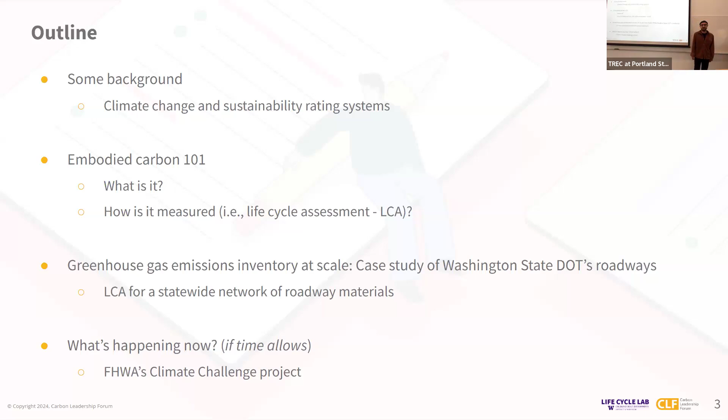or other environmental impacts. And then I'm gonna shift to the project that I was advertised to talk about today, which was the inventorying of greenhouse gas emissions from roadway construction for WSDOT. And then if we have time, I really didn't practice the timing today, but if we have time, I'm going to talk about what's happening now in the world of embodied carbon and life cycle assessment. So we'll see how much I can get. All right.

Do I really need this slide? I don't know. Maybe not important.

Climate change is real. It's happening. We have a ton of evidence. I'm not going to spend like 2 hours proving that it's happening. But what is probably interesting here is, as you may know, global temperature has a very high correlation with the amount of greenhouse gas emissions, in particular carbon dioxide, that we put out in the atmosphere. So it's evidently not the sole cause of rising temperature and climate change, but it is one of the most important. And also, buildings and transportation infrastructure materials matter.

They dominate the raw material consumption globally and in the US by over, I would say, 80% of total raw materials that we consume. Steel and cement alone are responsible for more or less 15% of global greenhouse gas emissions. Again, global is the key here. It's a little bit less in the US. But again, big deals, steel and cement alone. Cement alone is thought to be about 8% of total global energy consumption and CO2 emissions. So that's a big deal.

And also on the policy side, we see a surge of new policies coming that try to limit the amount of embodied carbon that we put out in the atmosphere. And you probably have heard of Biden's BIL, or bipartisan infrastructure law, that put out a lot of research money to see what we can do to reduce those emissions.

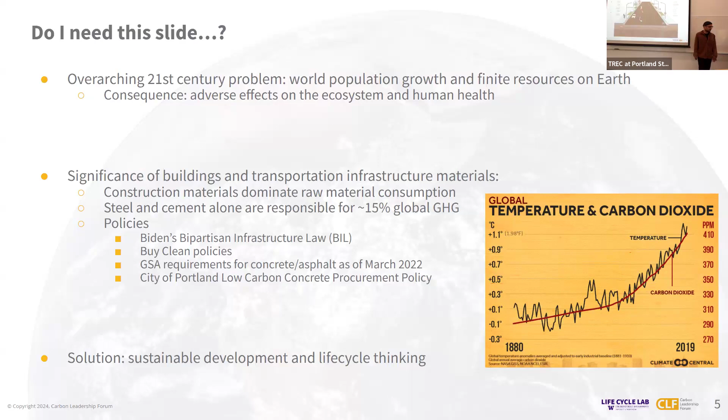So the solution to all of these things, if I want to put it very simply, is just sustainable thinking, life cycle thinking, and sustainable development. But it's a mouthful. There's a lot going on in just this simplest statement. So I try to kind of uncover some parts of it that I spent time on during the past few years.

All right, so I'm going to narrow down the focus a little bit here to roadway infrastructure because when we talk about infrastructure, I mean, buildings make sense. We know what buildings are. But when we talk about infrastructure, that's a very umbrella term for a lot of things. We have transportation infrastructure, water and wastewater infrastructure, electrical infrastructure, airfields, railways, metro. So we have a lot of different types of infrastructure.

But my research really focuses on roadway infrastructure, which is again not just pavements. People in the roadway infrastructure world think of roads as just being pavements, but that's just the surface of it, literally and figuratively. If you want to just talk about pavements, you're just touching the surface of it. There's a lot going on around it, underneath it.

You can see some of the labels here probably. Hopefully we can see them, but you can visually inspect them. We have sidewalks, curbs and gutters. We have a lot of pipes going underneath. We have sublayers. We have a lot of other things going on. So if you want to capture a good picture of what a roadway is, it's not just pavements. So I think that's just the message here.

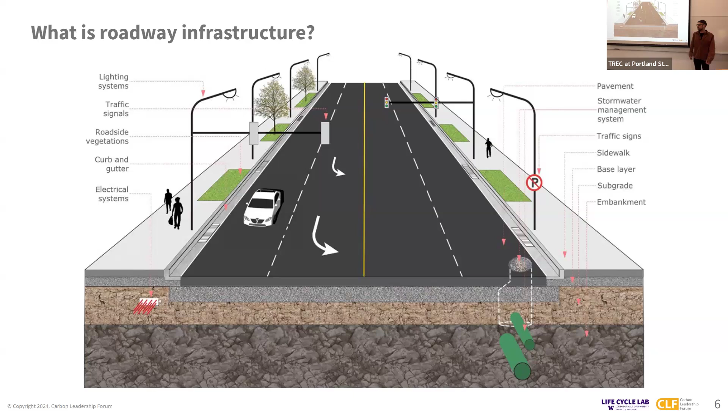So this is sort of where my journey into sustainability, and especially sustainable transportation infrastructure, started. I started with rating systems, and I think it actually started for buildings as well. Building sustainability sort of got more traction when rating systems started working. So how many of you have heard of LEED certification? So almost all of you, right? So it started, I think, early 2000, or late 20th century.

And then a little bit later, I would say a decade later, the transportation or roadway infrastructure industry is lagging behind a little bit from the building side. They're just following mostly how buildings evolve in terms of sustainability. And we at UW developed one of the first rating systems for roadways and transportation infrastructure, called Greenroads, in 2009. And I was lucky enough to join the research team that actually developed this.

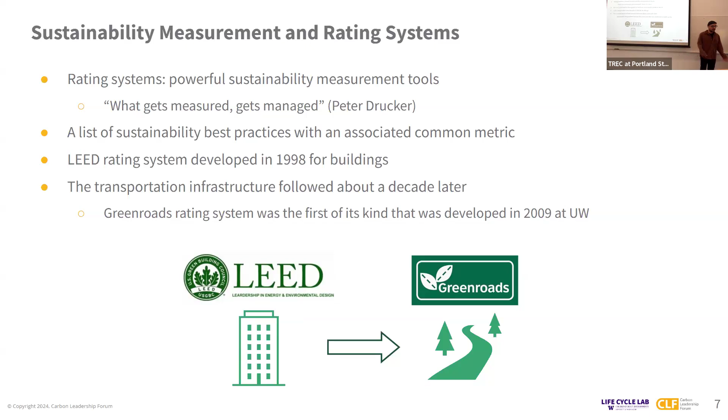So I started collecting a lot of data from them. I started looking at what sustainable roadway infrastructure will look like. And this is just one way of looking at what we're searching for when we talk about sustainable infrastructure or sustainable roadways. So you can see what I call a scorecard. There are some sustainable practices from this rating system in particular, and there are more rating systems now, like INVEST or Envision, that are mostly from the federal government, but we're using this scorecard as a very insightful one.

So a lot of these terms may be repeated in other rating systems, but the goal of this is to put things into numbers so that we can measure things. So this is kind of the main goal of a rating system. Just put some numbers into some things that we cannot really measure with a ruler, so that we have a common metric, so we can add them up, we can compare them.

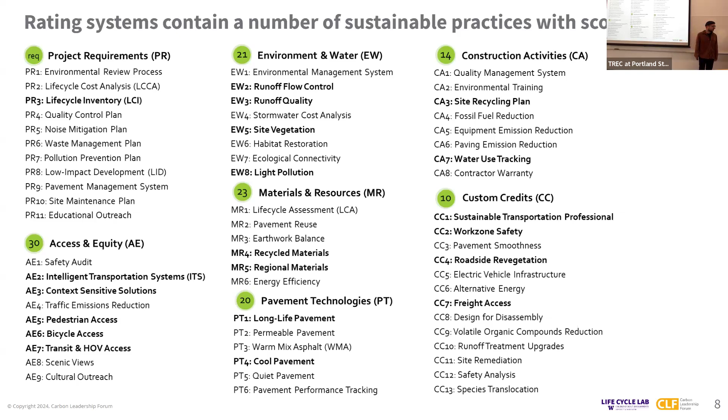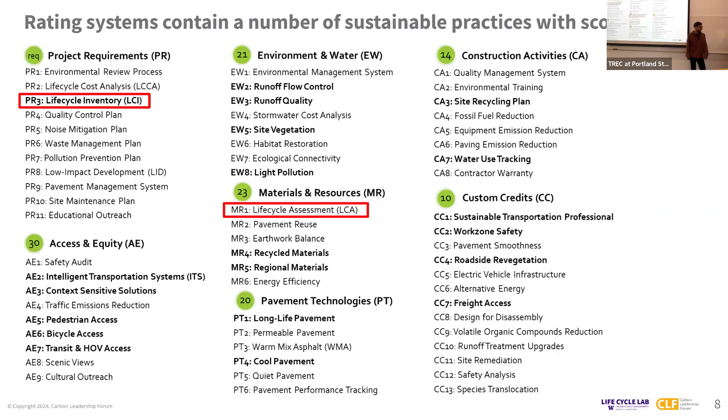And as part of this, you can see, again, this is just an example of an actual old version of Greenroads. But you can see life cycle assessment and life cycle inventory, which are both terms related mostly to embodied carbon, but related to life cycle thinking happening here. And that's for a good reason. The newer versions of these rating systems are actually focusing more on these two credits or categories that I highlighted here.

Like the pavement here was reused. Like 80% of the existing pavement was reused, but you can't really see that, right? So life cycle assessment and some of the other tools that quantify things are very useful to uncover what's going on behind the scenes, the things that are not visible. So when you do a life cycle assessment, the numbers turn out to be lower for the case of reuse, for example, or recycling, or some of the other practices.

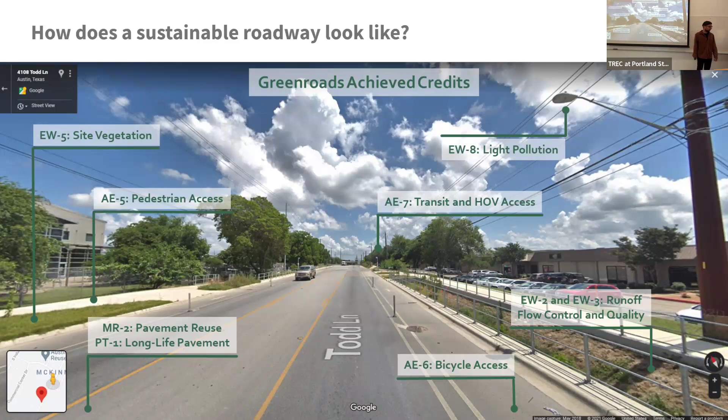But what it meant in practice, I spent hundreds of hours just extracting information from construction documents. And I don't know if you've spent time looking at construction documents, but there could be like 1,000-page documents talking about how they built a section of the roadway. It was not really fun, especially since finding a particular number from a 1,000-page document is tough.

And since the projects were coming from almost all around the nation, the language and the codes are not really consistent and similar. So some states might use one term for stating the exact same thing as another state does. So it took me, I would say, 2-3 years to digest all this information. It was only for 33 projects. You can't imagine how much harder it could get when we talk about a state's worth of roadways.

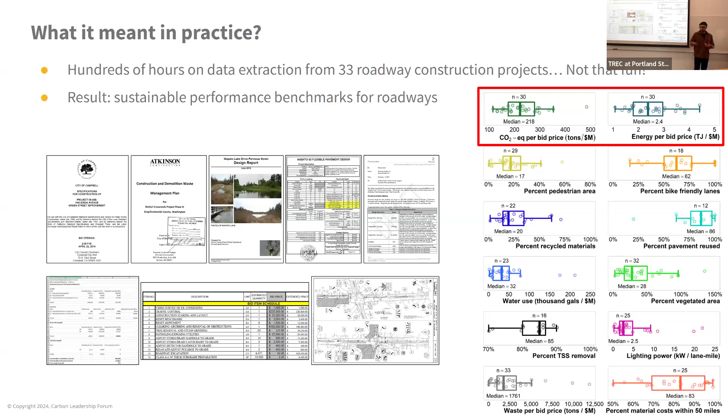And in particular, I started developing what I called sustainable benchmarks for roadways. So there were a lot of new parameters that I tried to introduce, and there were two that were of most interest to me, which were carbon emissions and energy consumption from those projects. And I tried to create those benchmarks based on the value of the projects. I could have done this in different ways. But this was my first initial attempt at trying to connect life cycle assessment and life cycle thinking and carbon quantification into something that policies can adapt and use to set some limits.

So a little bit about embodied carbon, but before I begin, how many of you have heard of the term embodied carbon and know what that is? All right, great. So I'm glad that I put out these slides here because a lot of other things that I'm going to talk about in that particular project relate to embodied carbon. So it's, I think, worth knowing the terms.

So embodied carbon is the cumulative life cycle greenhouse gas emissions that are released during extraction, manufacturing, transportation, and installation, right? So for example, you can see all the beautiful concrete columns in this building. And you may think how this thing was made from scratch, right? So, you extract the limestone and a few other rocks out of the ground, you haul them all the way to manufacturing facilities, you crush them, you make powders, you mix them, you heat them up in cement kilns, for example, to produce cement. For aggregates, for rocks, you basically just crush them.

And then you have to mix all these things together and then transport the mix, if you're making ready-mix concrete, all the way to the sites. And then you have to pour them somehow. And then this process continues happening during its life cycle, because after a few years, let's say 20, 30 years, you have to come back and repair some of them. So that needs additional materials. And then once the building comes to its end of life, you have to think about what you want to do with the building. Do you want to tear it down all the way? Do you want to reuse them? Do you want to recycle some of the materials?

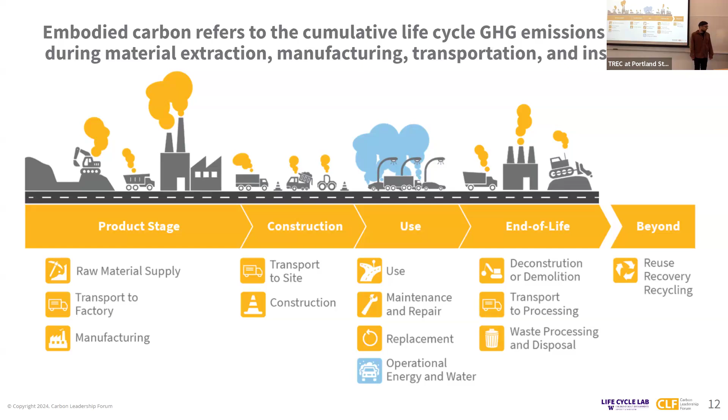And then I included this one because we usually seem to overlook another important aspect of carbon emissions, which we call operational carbon, which differs from embodied carbon, at least for buildings and roadways, in sort of the same way. So for buildings, it's usually about the energy consumption of buildings, how much electricity and how much heat you use to make buildings livable. And for roads and transportation infrastructure, it can get even more complicated because the users now become vehicles, and we know most vehicles burn gas to ride on the roads.

So we have probably a whole other series of research being done on traffic and transportation optimization to reduce travel time, so you reduce the amount of emissions. But those are a little bit separate from what we're talking about here, which is operational carbon and roadway infrastructure. So for roadways, it's usually just how you can maintain the road to be not livable, but drivable, right?

So think about things like roadway lighting, traffic signals, heat island effect is probably one of the big ones, due to the amount of heat that is absorbed by hard surfaces on the road, which are making urban environments a higher temperature, and also the fuel consumption of cars due to what we call pavement rolling resistance. So this is another big area of research that we'll talk about, especially when they want to compare alternatives, because people say asphalt causes higher friction between tires and the pavement, so it increases the amount of gas that cars need to burn, and it's less for concrete, and all those arguments.

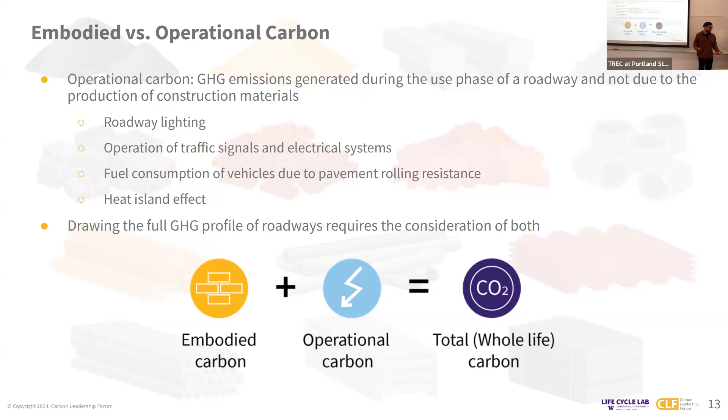So I think the bottom line of this slide is that you cannot draw a whole picture of the carbon emissions of a roadway or a building without thinking about both embodied carbon and operational carbon, and this equates to a term we call total or whole life carbon. But again, the focus of my presentation is not operational carbon. My area of specialty is not operational carbon assessment. And I just thought it's important to know that it exists at the very least.

So another way of thinking about greenhouse gas emissions is this sort of categorization. It's mostly a greenhouse gas emission accounting protocol where it divides greenhouse gas emissions into 3 scopes. So scope 1, 2, and 3 are the terms that mean different things. Scope 1 are the emissions that are directly sourced from owned or controlled by the agency. Think about the electricity that a State Department of Transportation uses, or the amount of fuel that it uses to heat up its buildings. So that becomes scope 1 emission.

And we have the scope 2 emissions, which are indirect greenhouse gas emissions from electricity generation that an agency purchases, right? For example, Department of Transportation may purchase electricity from different sources, and it has some control over which source to purchase electricity from, but it cannot control how the electricity is actually produced, right? So some control over the purchase, not any control over the generation of the electricity.

And scope 3 emissions are basically everything else. And that's hard to digest because a lot of other things also happen. But for our case, scope 3 emissions are mostly about the materials that an agency purchases. And that relates to Departments of Transportation very much because they're not producing construction materials like asphalt and concrete. Rather, they purchase it, right? They purchase it and they basically ask the contractor to manufacture it and use it on projects. And it's not directly under the agency's control, because agencies don't produce or manufacture those materials.

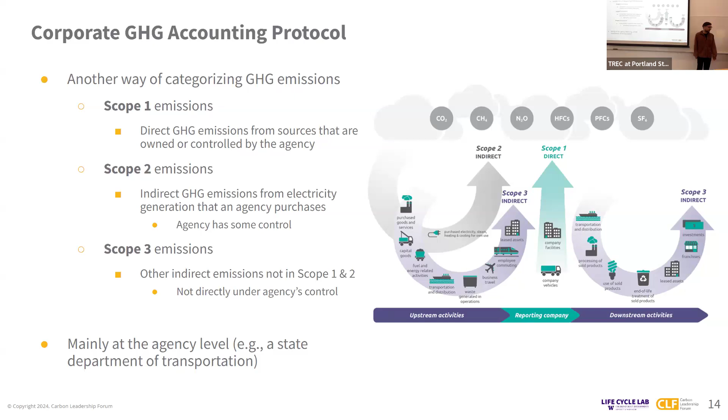And when I said this is a corporate greenhouse gas accounting protocol, it really very much applies to departments of transportation, and that's why it's now being used more frequently to account for greenhouse gas emissions.

And then comes LCA. So how many of you have heard of LCA, life cycle assessment? All right, few of you. That's great. You have probably heard of the term life cycle cost analysis, which is sort of the same way of thinking about accounting, but life cycle cost analysis is mostly about cost, as the name suggests, and life cycle assessment is the same way of thinking, but the measure here is environmental impact, or several environmental impacts. So it's a standardized methodology that helps us quantify environmental impacts. And there are different standards out there, from the US, from Europe. But in the US, it's mostly ISO 14000 series, 14040 and 14044.

And what we really measure using life cycle assessment in terms of greenhouse gas emissions or embodied carbon is measured in units of carbon dioxide equivalence, which is basically a metric that combines different greenhouse gas emission impacts and how they impact climate change. And that's why we have this term global warming potential, or GWP, which is the measure, and the unit is CO2 equivalent.

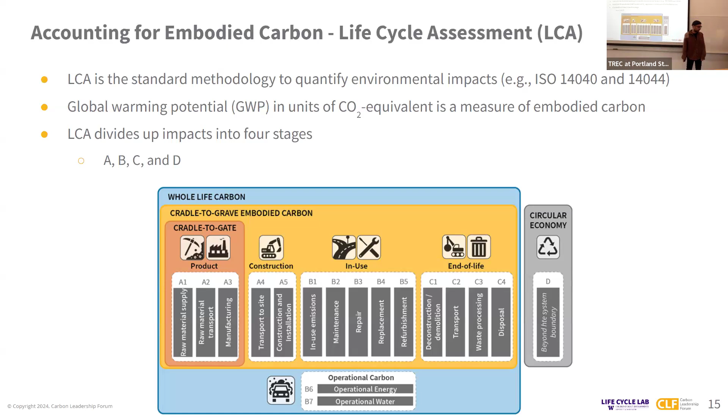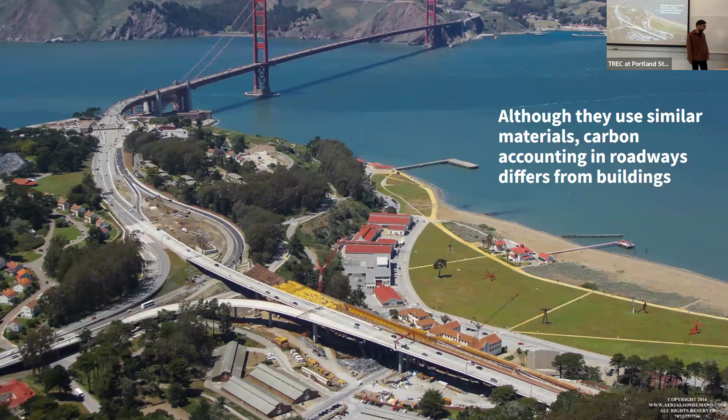So although buildings and roadways use the same materials, the accounting practices are a little bit different between the two. I talked about the operational carbon example, and embodied carbon is sort of the same. So for roadways, this is just a hierarchy of different LCAs you can run on a roadway. So you can just do an LCA for a product, let's say the concrete or asphalt you use for a roadway, and that becomes a product level LCA.

And then it could be expanded to include more products, the series of products that are used to build elements of the roadway. We can think about a pavement structure, sidewalks, curbs and gutters, which probably have a combination or a mix of different materials and products to be built.

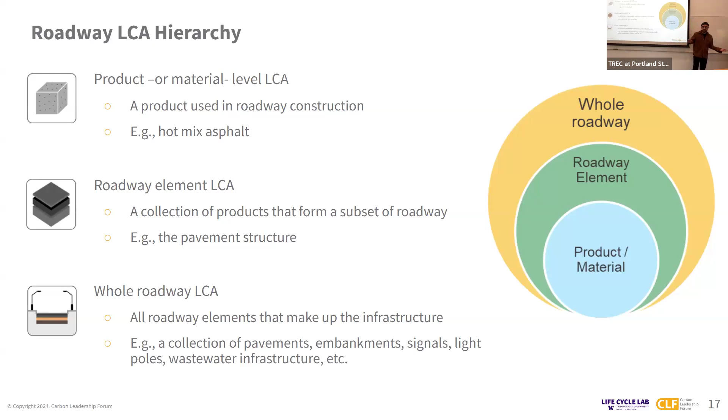And then we have whole roadway LCA, which is basically all of the roadway elements that are used to build the whole infrastructure. It could be a combination of light poles, pavements, curbs, gutters, everything that you think about, even the paints on the road and all that. So that becomes a whole roadway LCA.

And then we have EPDs that you have probably heard of, and EPDs are becoming standard practice in reporting life cycle assessment results. They are not usually cradle to grave; these are mostly cradle to gate impacts, as I defined them earlier. And these are following standard documents called PCRs or product category rules. They outline the standard methods to be followed to do the LCA.

Because there are many ways you can run an LCA. And without a standard, everybody can do it their own way to advertise for their own product, so to have a common ground for everyone to follow rules, PCRs are developed, and they're being more and more used in policy making and accounting practices and all that.

And once you have a collection of EPDs and also some of the production volumes, because EPDs are just per unit of a product, let's say the carbon footprint of a cubic yard of concrete, and if you know how many cubic yards you use in your building, you can do some simple calculations to find out the total. And then afterwards you can set benchmarks, thresholds. Cities usually do that. State agencies and federal agencies do that to set the standard, set the threshold, so that everybody has to be below some limits.

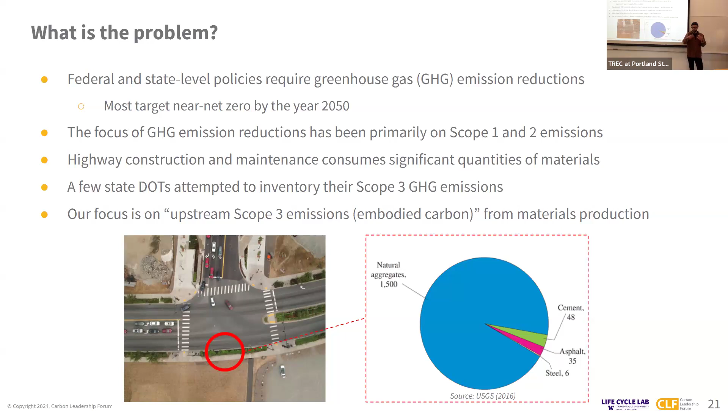So a few of the research questions, I think I went over all of these, but our overarching questions were, how can we quantify greenhouse gas emissions? We knew that we're going to use life cycle assessment, but we're wondering what data is available for us to use. And then at the end, how can we recommend to make the process better and smoother, make the data collection more efficient, and think about ways that we can use these data and analyses to reduce embodied carbon in the future.

So we tried to propose what we call a decarbonization roadmap for WSDOT, or the idea of it. We didn't really expect them to implement it right away. But just having an idea of how this can be produced and thought about was our goal.

So we limited this study to 2017 to 2021, and we all know that COVID also happened during this time period, and that was one of the reasons why we expanded it to include 5 years, because the amount of construction really was reduced during the COVID time, and we can actually estimate how much it was reduced. It's sort of cool to see the effect of COVID on our results too.

So we started collecting data. So everything at the end, when you want to do the actual technical analysis, comes down to data. So we conducted a lot of interviews with WSDOT folks to the point that they were really tired of us, because I was just bugging them every week: where can I find this, where can I find out this, the database is not working, why don't you have this data in the data set, why are you organizing your data this way? I started questioning and digging into their system, which was pretty old.

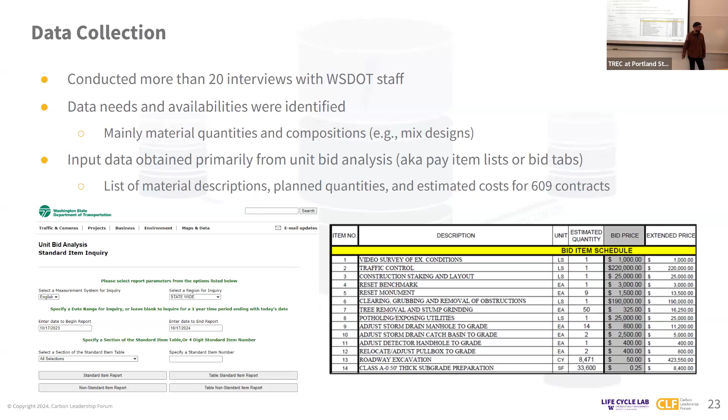So I started digging data for the past 5 years, from 2017 to 2021, and I found that there were about 609 contracts that were actually working during that time period. It was probably a little bit lower on an average basis because, again, of COVID. So I started collecting these data, and again, this is publicly available, so you can just go to WSDOT's website and search for unit bid analysis, and you can find all this. But that was not really sufficient.

Although they had good records of some material quantities and some pay estimates, they were not final quantities, meaning that they used those pay item lists to bid projects and award the projects, right? So there were some challenges in that because those numbers were mostly estimates. There were not final quantities from the projects, so we didn't have actual numbers. But in my opinion, it was enough for us to start estimating.

But we also leveraged a lot of other data sources that were pretty much scattered across different databases and data sources and offices at a state DOT level. And it was hard to find out which office really manages which data set because they were all scattered. Some offices had data sets that the other office also used. And there were sometimes 2 different data sets to keep the same data. And sometimes the same data that they had didn't match. So a lot of challenges in figuring out who's right and who has the best data.

And it all came down to knowing one person who knows all the data sets. And we actually had that link to that one person, and she really helped us understand the mechanism behind all of these, and she really helped us point at the right person. It was just one engineer who was managing the data, and we were lucky enough to connect with them through a lot of connections. I was a grad student at UW. I'd worked with WSDOT before. My advisors were also working with WSDOT for 30 years, so I had good connections to find the right persons. And it boiled down to this data ecosystem.

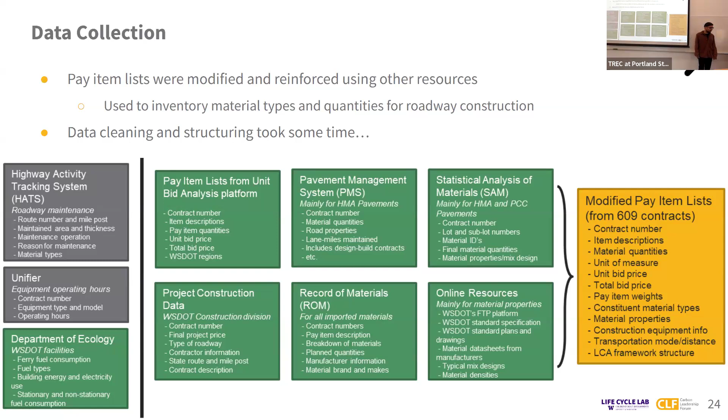So good stuff here, but again, hard to bring them all together. And that took me almost a year again to pull these all together. And then based on the data that I collected, which was, again, based on the unit bid analysis data, pay item lists, I built a lifecycle framework on that because we don't have much of an LCA tool for roadways, or at least by the time we didn't have such a thing.

So I started to, again, build it from scratch and apply the concepts myself. So it was mostly a spreadsheet format that I started developing, and it was, again, based on the pay item list data. I used several different types of data sources other than material quantities that I collected from WSDOT.

So LCA has 2 main parts. One is how much material you use to the smallest decomposition possible. For example, if you have like a concrete mixture, you want to know how much cement, how much aggregates, how much water, how much admixtures, and a lot of other things were used in the actual concrete.

And you also want to know the environmental impacts of them, right? So that's when life cycle inventory comes to play. It's a data set of environmental impacts from all of these materials. For example, for cement, we have different types of cement for sure, but life cycle inventory data has information about, let's say, CO2 footprint, methane footprints and a lot of other different emissions footprints in them.

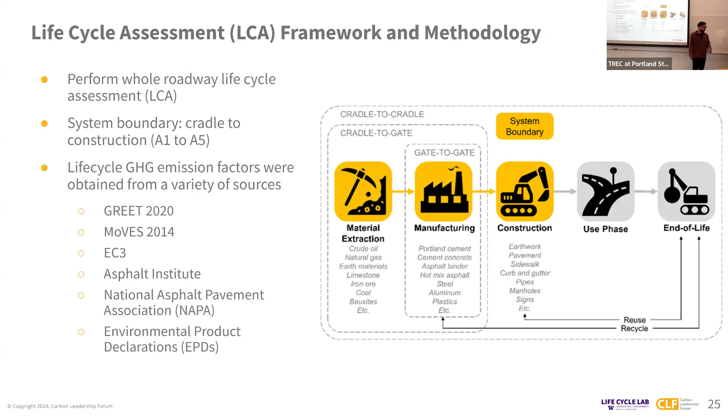So I started collecting quantity data from WSDOT, and also from several sources, I started digesting and collecting life cycle inventory data. So that in simple words, we can multiply these two together to find out the total carbon emissions. So I took two approaches. I'm not gonna, again, dive deep into the calculation here, but the math is sort of simple. It's mostly linear algebra, a bunch of multiplications, but you have to consider different things.

For example, for transportation, you have to consider transportation distance and types of transportation, usually trucks in our world. And then emission factors for fuels, gasoline, diesel and all that. And it's the same for construction equipment, like rollers, pavers, these things that actually build the road, and also materials. So when you add them all together, you have a full picture of A1 to A5 impacts or cradle to construction impacts. So the first approach I took was simply this, right?

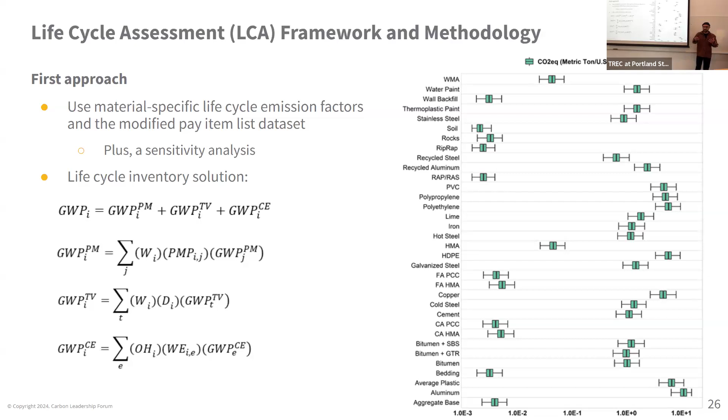So this was the first approach, multiplying these factors, which I call emissions factors, by material quantities to the finest resolution possible. But the problem was we didn't have data for all of those 609 contracts. Especially if you're familiar with contracting, we usually have two main types of contracting: design-bid-build, and design-build. So as the name suggests, design-bid-build goes through a bidding process, and so the name bid tabs or pay item lists, right? For projects that don't go through the bidding process, which are design-build, they don't have that pay item list in WSDOT's database.

And those projects tend to be huge projects. Like we had a $500 million design-build project or $1 billion design-build project. So it was a big miss if I missed those, right? Because they contributed to about 40–50% of WSDOT's total budget, but I didn't have any data for them because they were just huge and they were design-build projects. And that's why I took a second approach, which was mostly a math game for me.

So I've done some sensitivity analysis to try to estimate footprints of those projects. And how I did that was to develop what I call an economic-based emissions factor. So I collected all those data for the projects that I had data for, and I started using those life cycle inventory data to estimate projects' footprints.

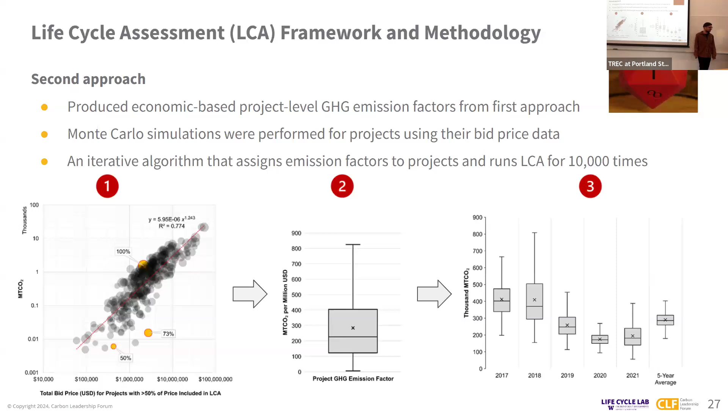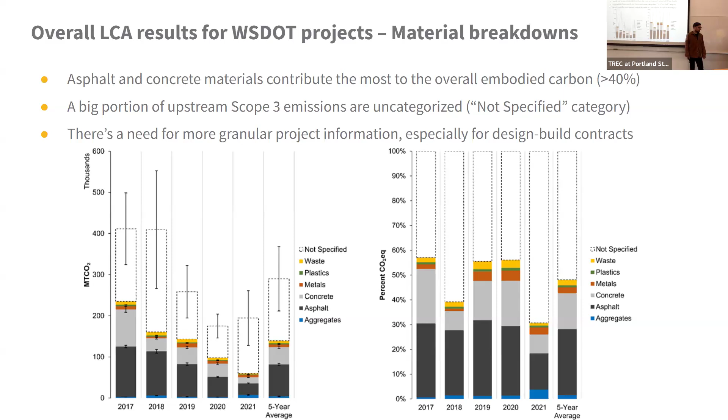And the rest that I estimated, it's good that I was able to estimate, but the problem was I didn't know the contribution of different materials to them, right? I found the totals, but I didn't know the contribution of separate materials. And you can kind of see the slowdown of construction material consumption, especially in 2020, and that's evidently the effect of COVID on construction. It almost halved the amount of money and the amount of emissions as a result.

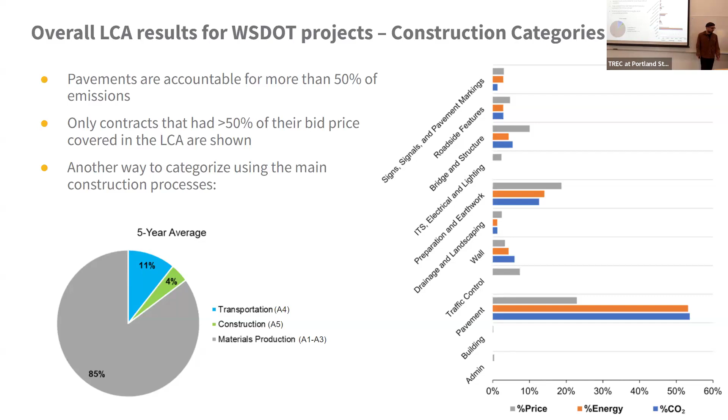And another way of looking at the data is to break it down based on these three different LCA stages. A1 through A3 again is the material extraction and production stage, which contributed to about 85% of total emissions, followed by material transportation, basically trucks that haul all these heavy materials, and construction plays a rather smaller role by contributing about 4 or 5% of total emissions.

Then I tried to put things into perspective because those numbers were really abstract. I found that on average, WSDOT produced about 300,000 metric tons of carbon. But what did that mean? So I started asking for data from the Department of Ecology, who keeps a better track of some of these carbon emissions, especially at scope 1 and 2.

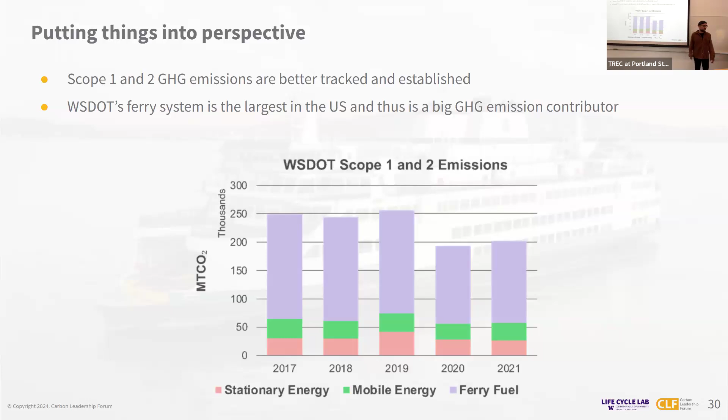So I asked them for data for that 5-year span, and this is the total emissions from scope 1 and 2 that Department of Ecology was able to capture. And you can see ferry fuels kind of play a big part in Washington because Washington has the largest ferry system in the US, and I think the second largest in the whole world. So you can imagine a lot of fuel being used to drive those.

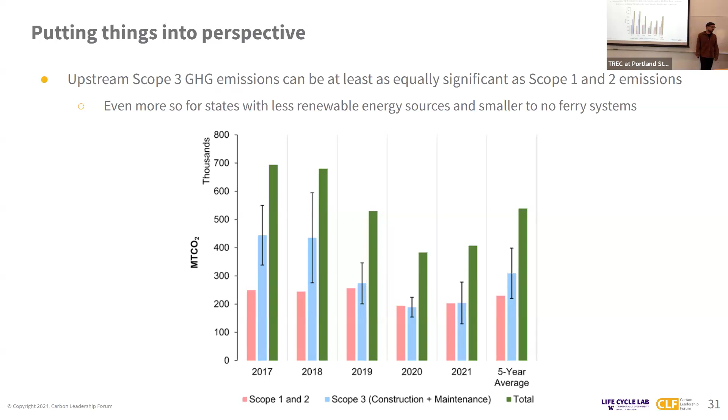So that was the point that I was like, seems like the method I kind of developed and the data I used sort of makes sense. You know, when you put numbers together, it's not like an order of magnitude difference. There were really close numbers. And again, it suggests that Scope 3 emissions were actually larger on average.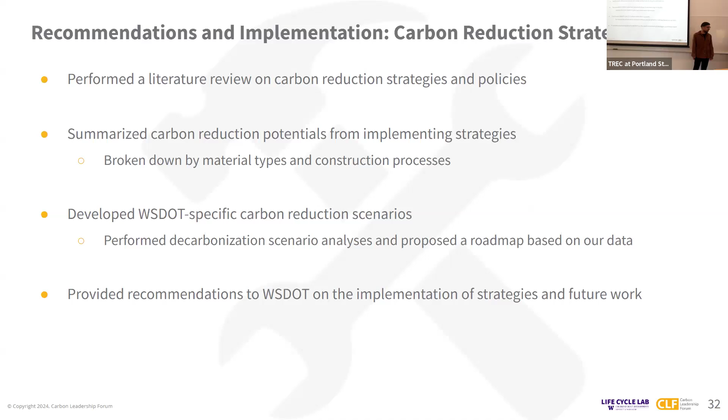So we started digging into the literature to find out how we can now use these data to inform some of the policies and suggest some decarbonization strategies, because we had the data to kind of implement these strategies. And then I came up with this list from the review to find out how we can reduce emissions from these material categories or from these construction categories that I tried to look at in my LCA. And these are just showing ranges of possible carbon reductions per strategy and per material. For example, we have asphalt recycling at the very top with the potential reduction in carbon.

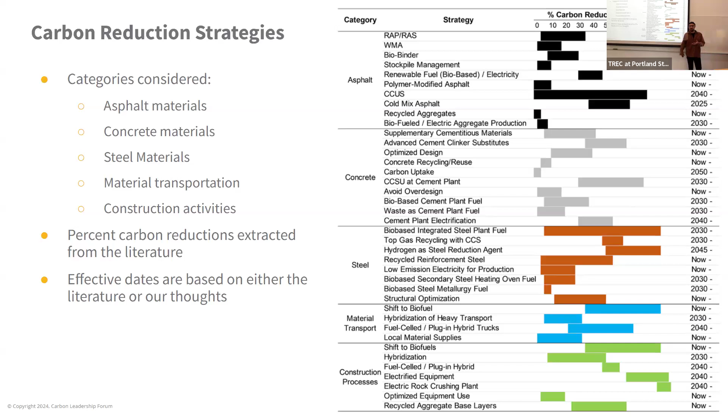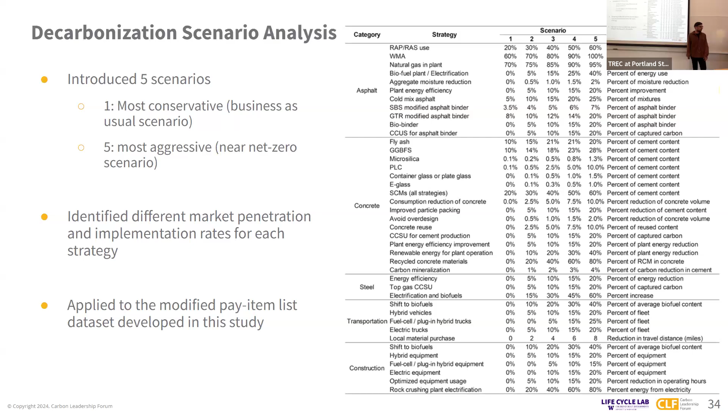We made some assumptions on how to implement these and what would be the market absorption of all these, like how many contractors are actually going to use recycled materials and all that. I put these all into numbers and some scenarios because it becomes scenario based, like how aggressive you want to recycle. These are just some hypotheses or assumptions that we can make. So I came up with a list of 5 scenarios, becoming more aggressive as I go. Scenario 1 pretty much depicts the business as usual, and scenario 5 is the decarbonization scenario, as they called it. And then I started applying all these reductions into the LCA framework that I developed.

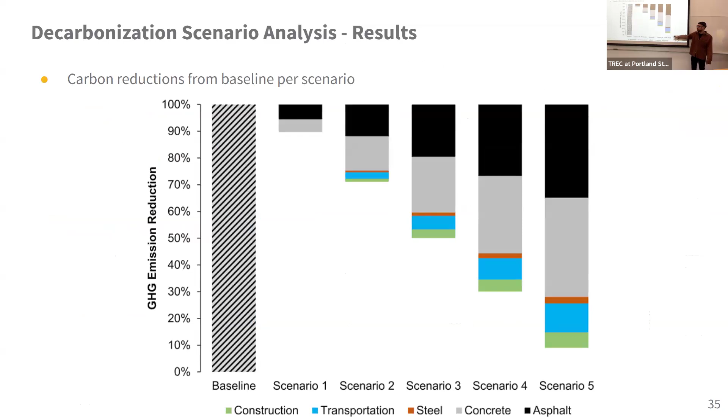The beauty of this was that I had access to the data. I could do whatever I wanted to the emission factor data, the quantity data. So I applied all these strategies into that framework and that data. And you can see how aggressive the scenarios are getting. And this is probably one of my favorite charts out of that report that shows the near net zero decarbonization scenario where you implement the most aggressive scenarios to get to near zero.

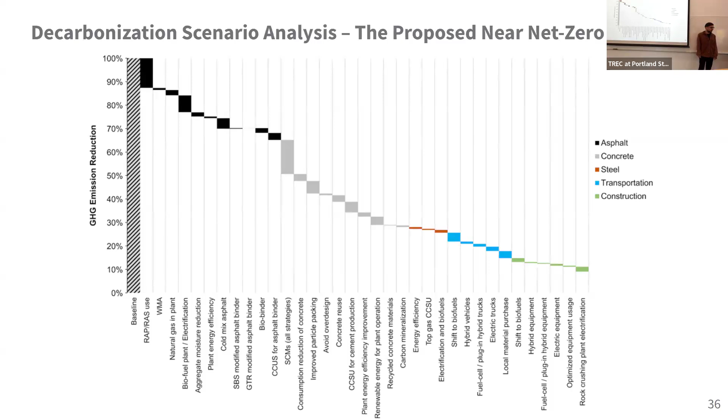It's real hard to get to actual zero here, but you can see the baseline, and I showed it in percentage because it makes more sense instead of just talking about pure numbers. And you can see asphalt and concrete sort of stay at the top, and recycling practices also stay at the top, like using recycled asphalt materials and supplementary cementitious materials are the biggest deals.

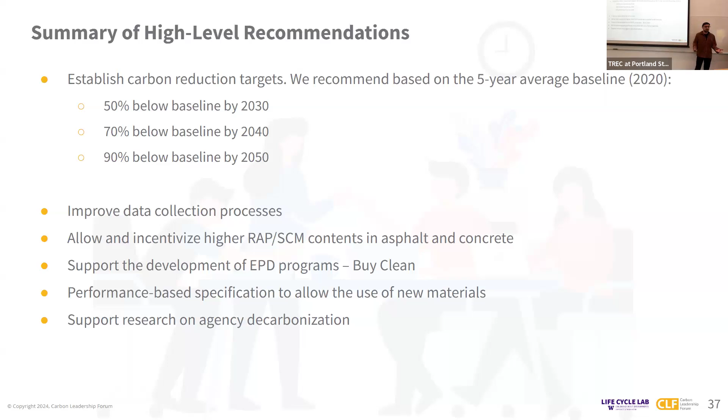And we had some recommendations at the end, like we set some targets for WSDOT to follow and how to get to near net zero by 2050. And some other suggestions on how they can improve their database ecosystem and what additional data they need to collect and what research they need to support. And I'm glad that it's actually happening these days.

So to sum up here, in this project, we developed a life cycle assessment framework for WSDOT to estimate their Scope 3 emissions. Our estimate was about 300,000 metric tons of CO2 equivalent per year, which is equivalent to, I think, maybe a little bit less than 100,000 cars driving a year. So that's actually a big number, right?

And we showed that upstream Scope 3 emissions are at least as significant as Scope 1 and 2. We found asphalt and concrete are the biggest deals. So we start with asphalt and concrete and probably steel materials to begin with. And then you can think about more advanced strategies to decarbonize.